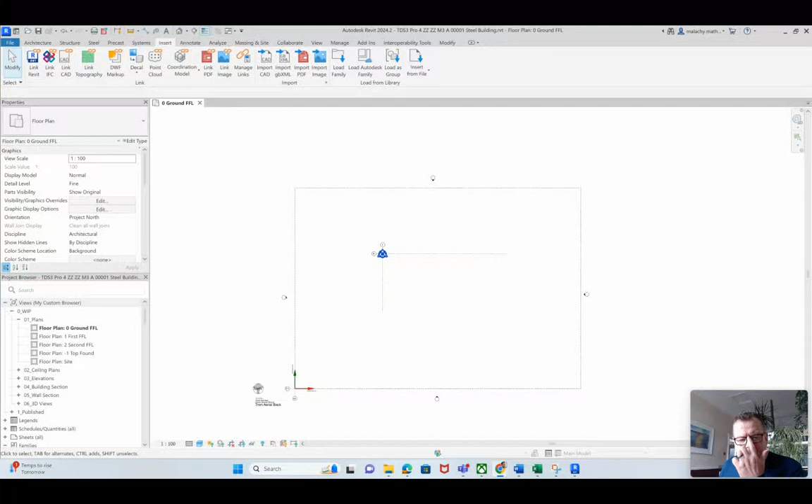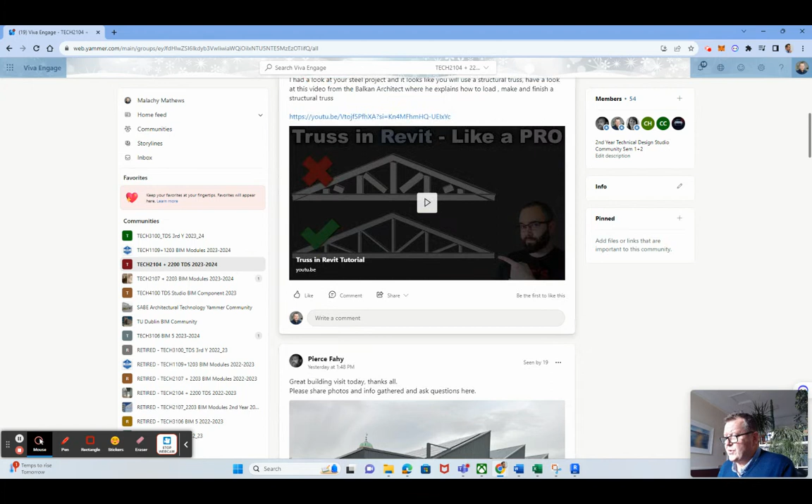A couple of other things first before we get into that. On your TDS Yammer page, I've put up a couple of videos that I think would be useful for you. Now I can see your building there, and that kind of truss is called a structural steel truss, that's what you're going to be running across here. There's probably north lights on that as well, and I can see there's a kind of metal roof, a zinc roof there. Notice the big hoppers here.

So designing the gutter there is always going to be the tricky bit of this one, I would think.

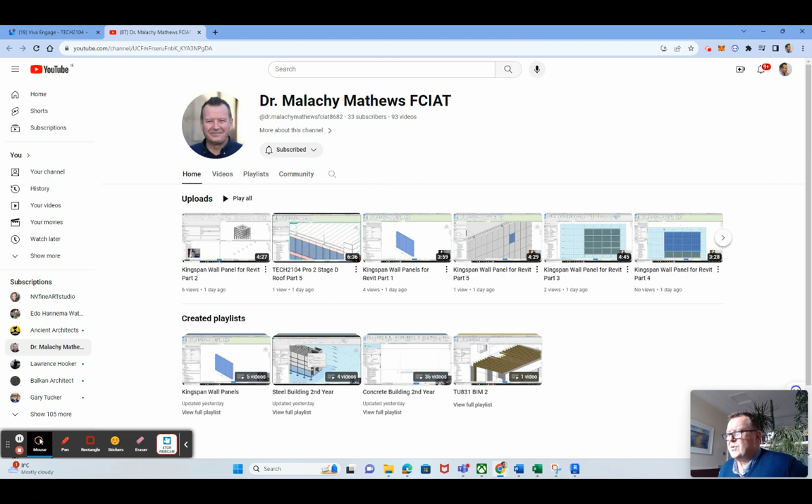However, to get started correctly on this, this is what I want to show you in this video. So I've created a new project from the standard template, the TU Dublin template that you've been using all the way along. And I've got my ground floor plan here.

Notice that I'm setting my scale here at 1:100, because what I'm going to do is import in the PDF that Pierce has supplied. It's on your Brightspace Yammer module.

Okay, so I've downloaded these. I think they're here, are they in documents? Maybe... oh yeah, sorry, I put these in here I think. Sorry, here they are.

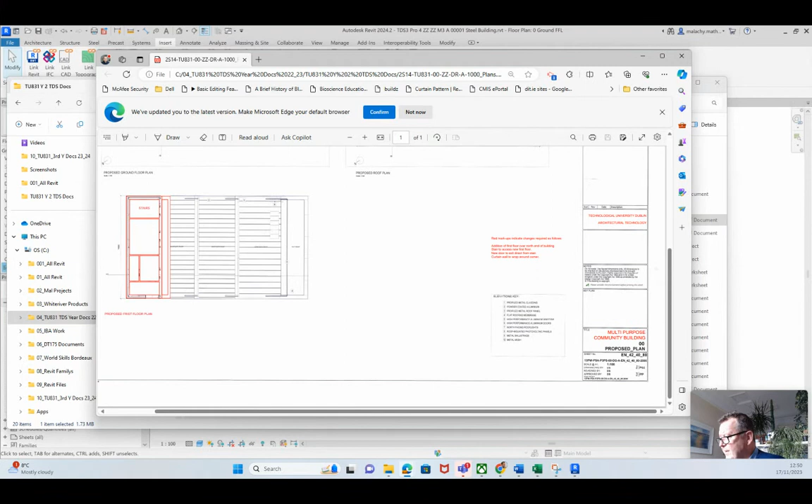Okay, so there's the plans and there's the elevations and sections. If I double click that, we'll bring those up. So this is what I was saying - I went down and checked the scale of this, and I see it's at a scale of 1:100, and so that's what I want to do with this one.

Okay, now, so what are we going to do? The first thing is I've renamed the file, so you name it according to the naming conventions. I put in TDS3, Project 4, ZZZZ, M3A, and 00001.

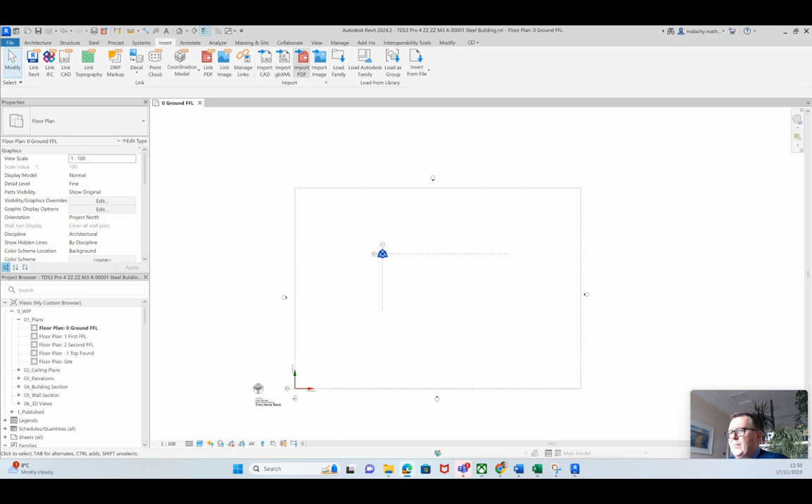So I'm into the Insert tab here, and I'm into Import PDF. I'm going to pick the PDF as the plans, and go Open. Now, the first thing you want to do is make sure you've got the DPI set to 300, and that normally works quite well. If you miss that step and leave it at the default 72, it gets very grainy and pixelated when you zoom into it, which is not good at all.

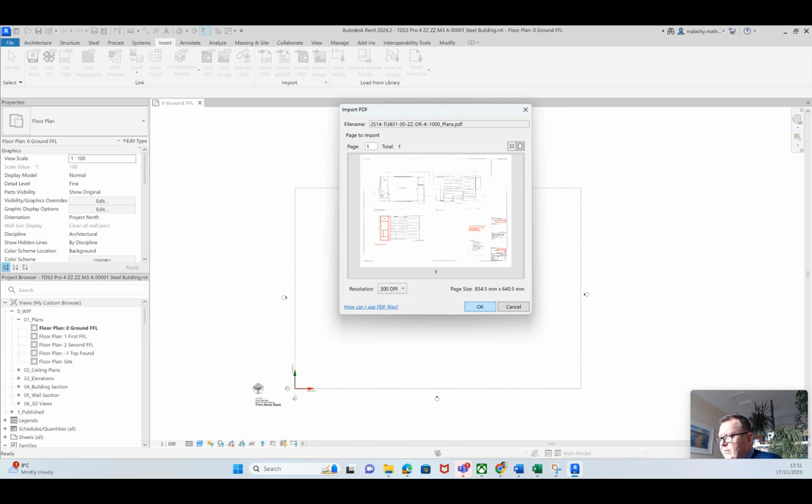Notice that it's coming in at an A1 size, so I'm bringing the A1 sheet into my drawing, which is set at A1. That means we don't have to scale the PDF up and down. So I did OK, and it should come in now at the end of my cursor, like so. I'm going to left click and position it.

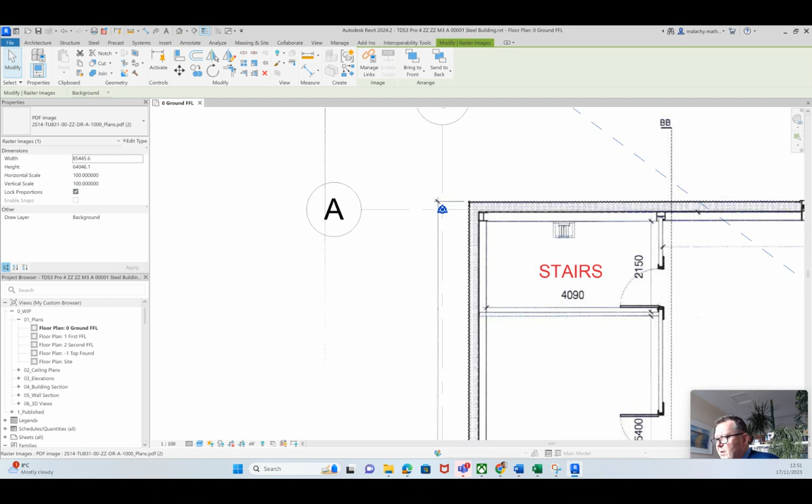Escape. Now, what I'm going to do is see that column there - I'm going to use that as my setting out column, and I'm going to move the PDF up like so. At the intersection of grid A and 1, I'm just using my arrow keys here to move this into position.

Again, I'm going to move it in a little bit tighter. So I want to get the center of this column roughly set out at the project base point here.

Okay, so that's that. Now that's a good setting out point to start with. When you've done that, select the PDF and pin it in place.

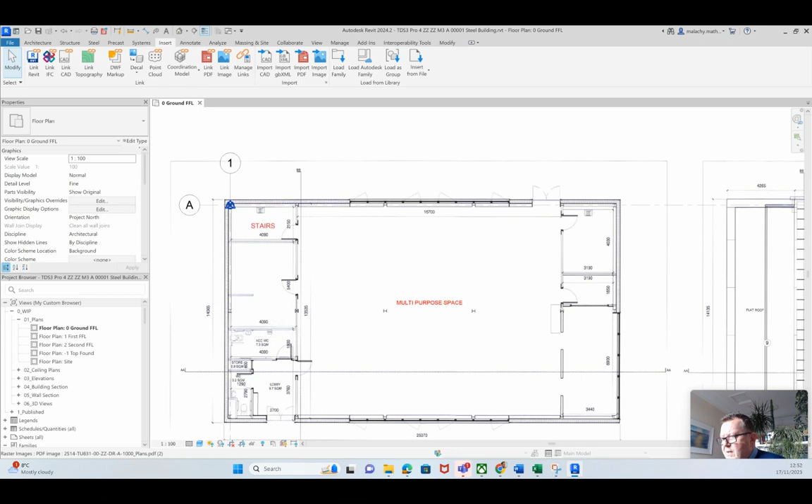Now what we want to do here is create some more grid lines, because your columns and beams, steel columns, will love grid lines. This would be a great start. So I'm going to right click and go create similar, and we've got one here by the looks of things. I'll just never mind about the annotation at the moment, I'll change that when I get there.

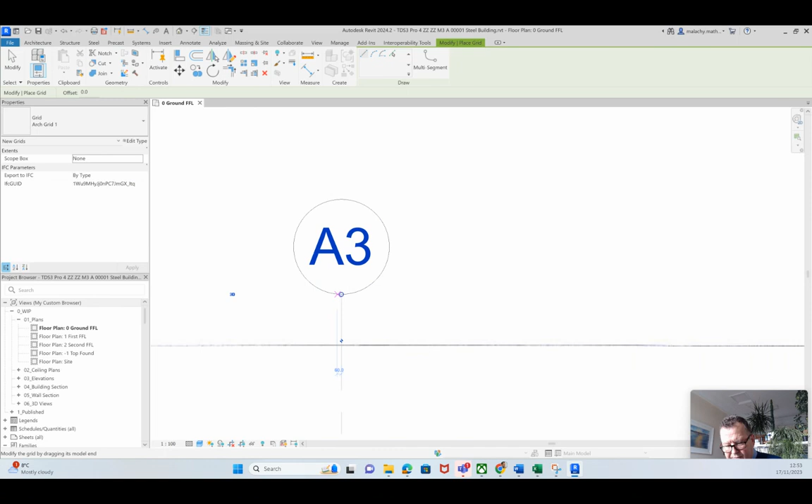Okay, so let's create similar, and we'll do. There looks like there's one there. So again, I'm getting as close in as possible. It's never going to be 100%, and I might run a series of dimensions across there just to get everything kind of regular.

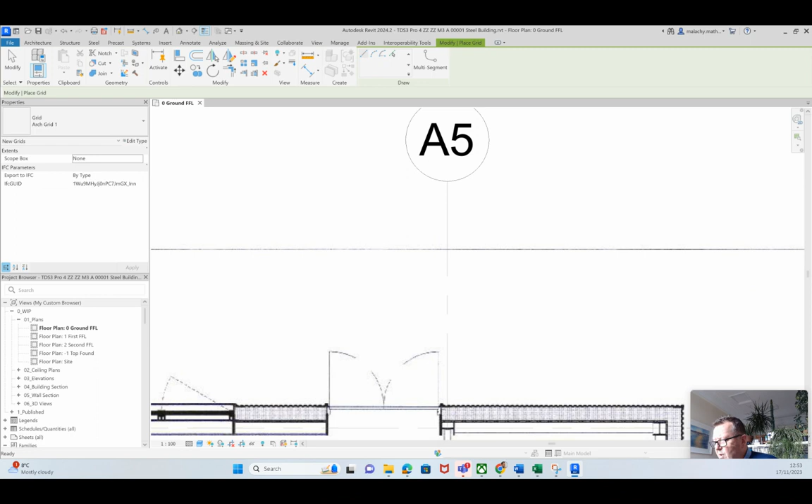That should be so. But again, right click, create similar. Here's our next one there. So it's worthwhile going through this exercise to get your grids set out properly, and if you do, I can guarantee it'll help with everything else you're doing here.

So that's create similar, and I think there's one here, isn't there? One there. And then there should be one down here as well. There it is there.

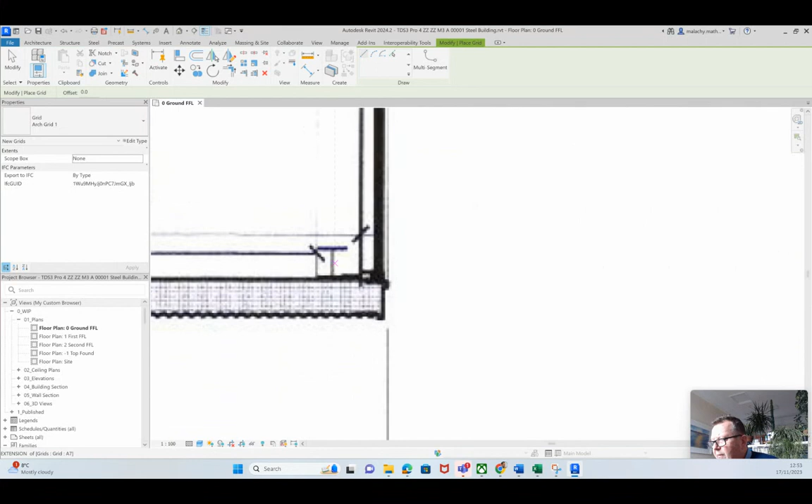So now let's zoom out and see how we're doing. I'm going to take these and bring them the whole way through. Okay, they're all there. And I'm going to grab the grip and take those the whole way through there as well.

All right, now let's take that, turn that on, turn that on. Now let's just go in and regularize these. So this will be B and C.

Okay, let's pull that out to match that one, and then let's pull this up here a little bit. So that can be 2, 3, 4, 5, 6. Okay, now let's just get all of these in line here.

Now, okay, so I can come over here and I'll turn that one off and I'll turn that one off as well. Now, so we've got our grids set out there. And what we want to do is just regularize these. So I'm going to go into annotate.

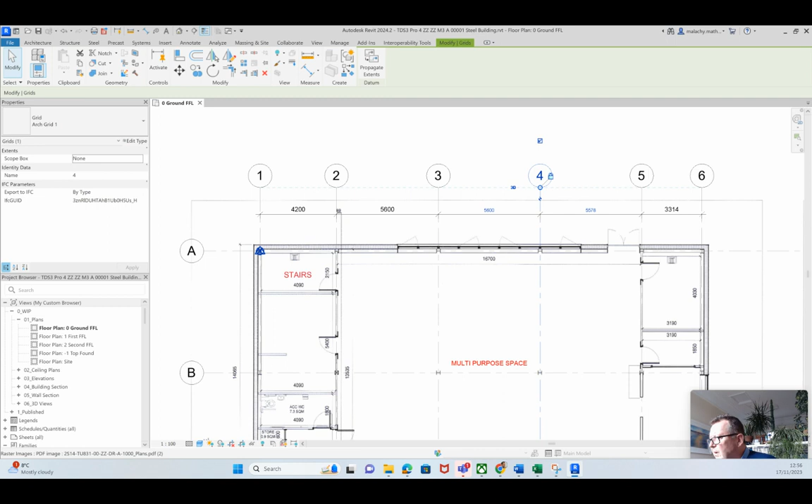Let's just tidy this up. Now that's a little bit better there, and we can maybe just regularize this one, and that would be say 3.3. Oops, okay, pick it again. Now that's how you can get your dimensions a little bit more accurate that way.

Let's just do these ones here while we're at it. So, annotate. And I would suggest that these should be coming in around the same, so they're 6.7, 4.2.

Okay, so I'm going to pick that one and change that to 6750. Okay, and same again here, pick that one. Gone back to 4.2, let's see if we can change that again.

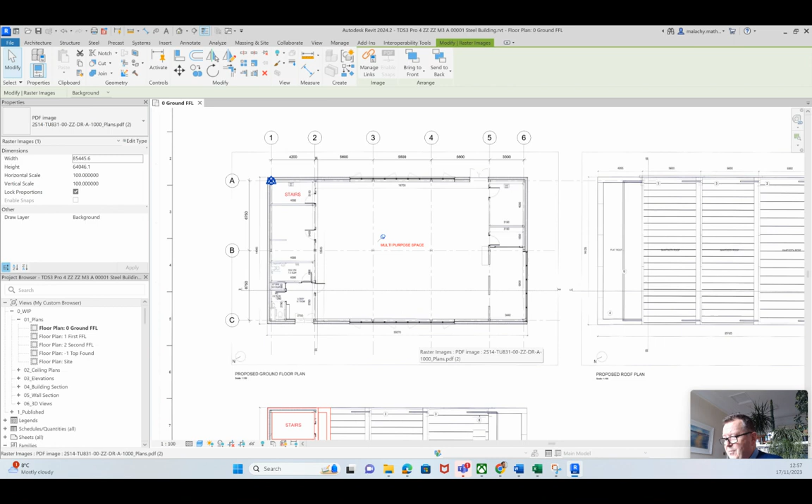Okay, there we go. Now so I've got my grids regularly in place, so that's a great start with this. Now that means you can now place your columns, knowing that they're going to be lined up vertically and horizontally on those grids. All right, so I might do another couple of videos for you to get started on that, but if you can do that now, you've made a very good start.